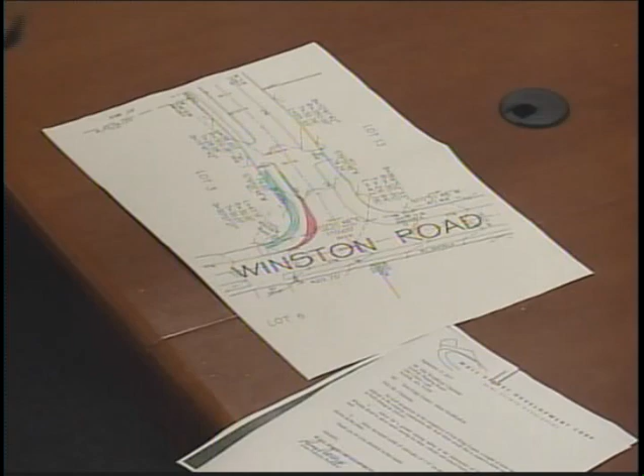What's shaded in pink is the area that should have, where the turning radius should be. The line on the inside is actually where it is, where we had a Cape Cod berm, which has since been removed, and the sidewalk has been constructed in the appropriate location. So the request is to allow a wider turning radius than what was originally shown on the plan, and the benefit is that it allows for larger trucks, buses, and other vehicles to make that turn rather than going back to what was originally proposed.

Let me just show you a photograph, I just passed these around. So what you see there is the line of where the radius should be as it's painted on the ground. So what would happen if we went back to the original plan, this pavement would be cut out, and the grass strip would just be wider than it currently is.

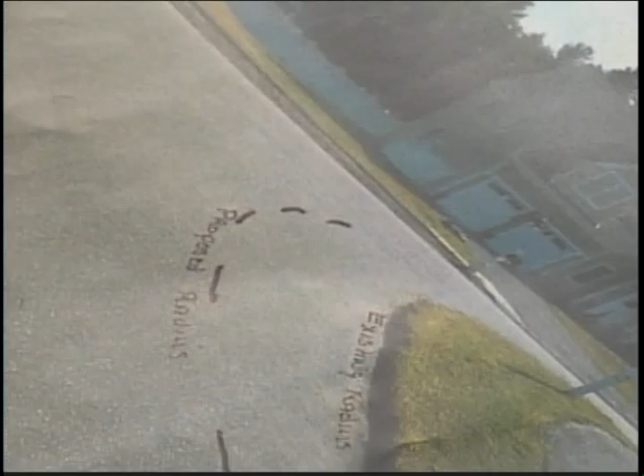After discussing it with Bob and John, we thought perhaps we may want a wider turning radius there for the school bus to get around and come up and around, and other construction vehicles. The second request was when they paved the sidewalk along Winston Road, in a couple of areas the sidewalk was paved a little bit wider than the minimum requirement of 5 feet. In the particular location where we measured, it happened to be where we constructed the handicap ramp. So rather than cut everything up, we're asking it to be allowed to stay at approximately 5 feet 6 inches, and the grass strip will be a little bit narrower in that location.

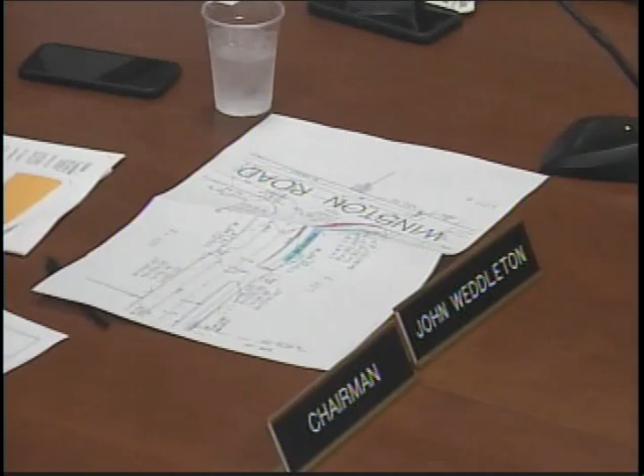So those two. How many feet of sidewalk are we talking about? Lengthwise, it's really kind of in this section. It varies, but mostly in that section where the handicap ramp is located. Yeah, so it's not much. If you put an eye to it, you really don't notice it, but if you actually put a tape to it, you will notice it.

Just a couple of comments. Thanks, Lou. My points are, when I talked to Lou, the change in the radius really is still in the right-of-way, which is the main thing. So he's not infringing on private property. He's not needing to get an easement.

And to move that back for the sake of making the radius according to plans, well, what you're talking about is digging up cement handicap ramps on both sides. There's a junction box there with a lot of electric connections. You're talking about moving all of that, and really, I think that's kind of punitive just for the fact that he's got the radius off a few feet. And again, it's still all in the town's right-of-way.

On the sidewalk thing, the same way, the sidewalk extra - and this happens all the time on construction - the sidewalks could vary, not exactly 5 feet. In this case, he's got a section that may be 5 feet 5 inches or so, but it's taking away from probably a 6-foot grass strip. So looking at it, it really is not even noticeable.

And the thing is, too, this sidewalk abuts another, these cement handicap ramps are everywhere. So if you made the sidewalk less, you're talking about jackhammering up the whole cement handicap ramp just for the sake of a few inches. So I thought it was absolutely a fair request.

I think it's a minor change, and Bob McGee, he's not here, but on the site he did agree with me. So that being said, comments?

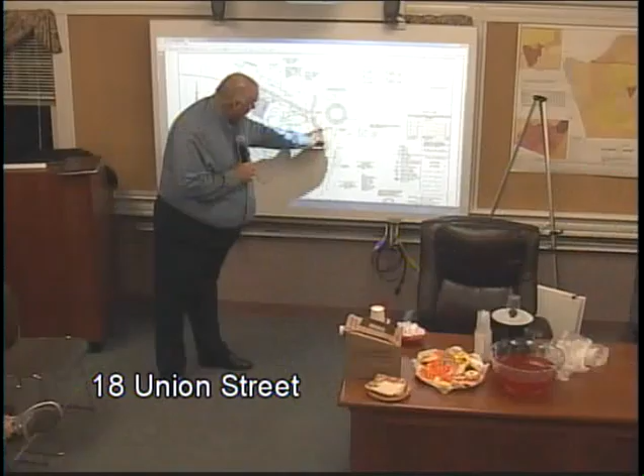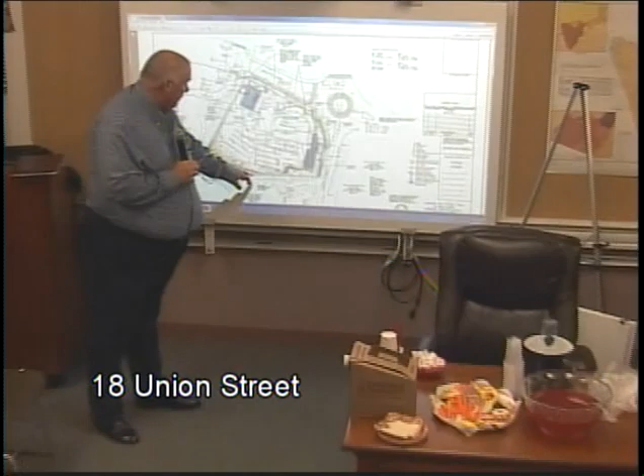So those changes were all agreed upon, and are they incorporated in these plans now, Rick? They are, Mr. Chairman. We've extended the sidewalk, which originally ended at the driveway entrance, down to their property. We've located all the trees, as well as the cesspool on the abutter's property, and we've pulled the retaining wall about 5 or 6 feet off the property line.

We've also introduced, shown here in green, some steeper grading that would be armored with riprap.

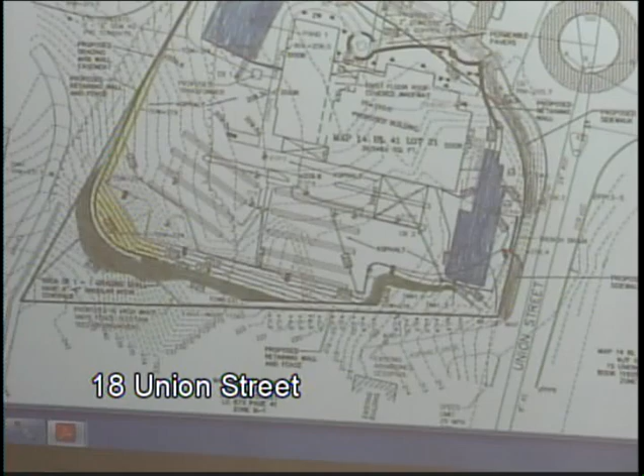While we're waiting, are those existing trees or new trees, Rick? These are existing trees on the abutter's property that they requested we field locate, which we did at that meeting. There are actually 2 rather large maple trees, and a majority of the trees are evergreen, which provide a nice screen currently from their property to this property, and those will remain.

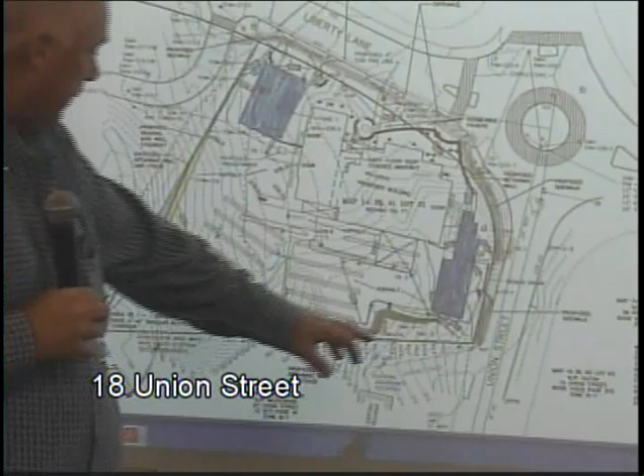What his suggestion was is that we move the retaining wall out, which we've done. With the revised grading scheme and relocation of the retaining wall, we're able to get this wall about 5 or 6 feet off the lot line, and the height of the wall is about 4 to 6 feet. What we're going to propose, and what Jason from Bowler will show you, is some landscaping plans on how to address the areas shown here in yellow, where there's another retaining wall located. That area will be planted to screen the height of the wall, which goes from a short height here to approximately the highest point at 10 feet.

If you recall previously, we had 2 staggered walls there. There's also a fence, which Jason will show you, a white vinyl attractive fence, that's going to be located on top of the wall with a planting area proposed in front of that. So we have that visual break of the retaining wall and then the fence kind of stepped.

So we can get into that. Jason will get into that as well.

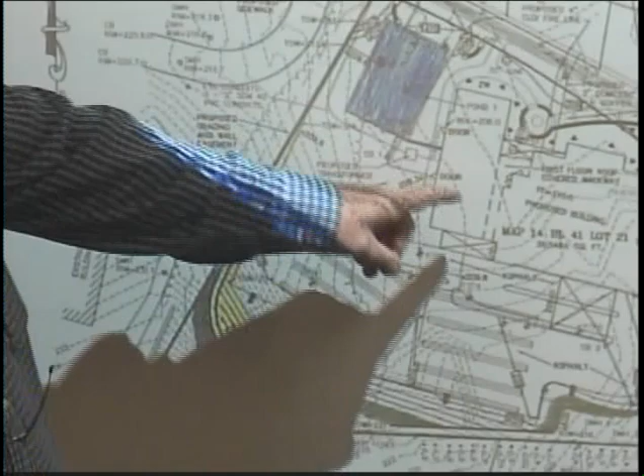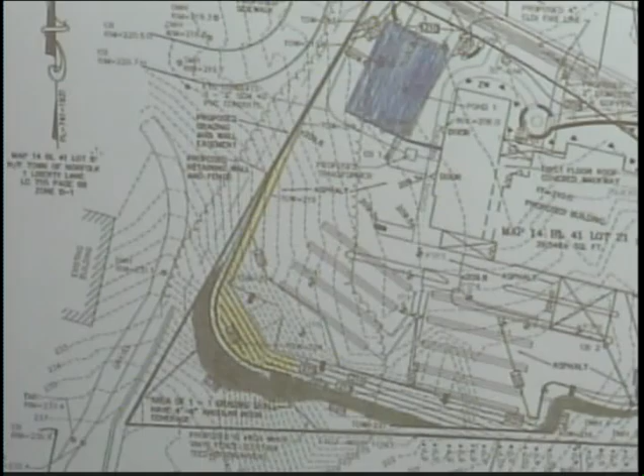What we've also done is looked at the stormwater for the site and containment of the stormwater, and we've made some revisions to the original proposal, which was to capture the stormwater, treat it, and then discharge it into the existing drain system. We're proposing an underground infiltration area here for the proposed roof of the building, as well as catch basin 1. That catch basin unit has been revised into a helical separator treatment unit to treat the captured water from that section of the parking lot. Catch basin 2 is where it was originally proposed.

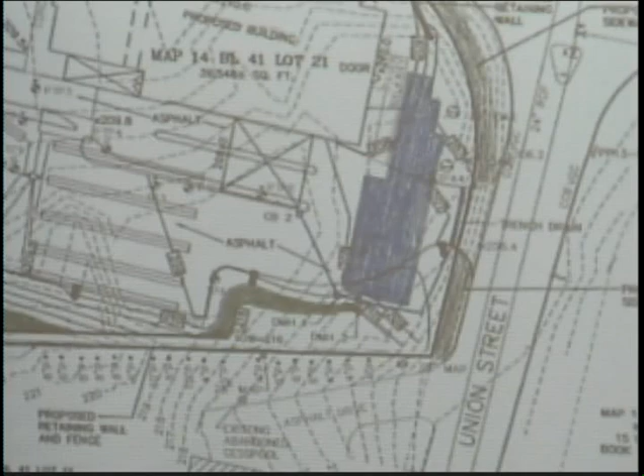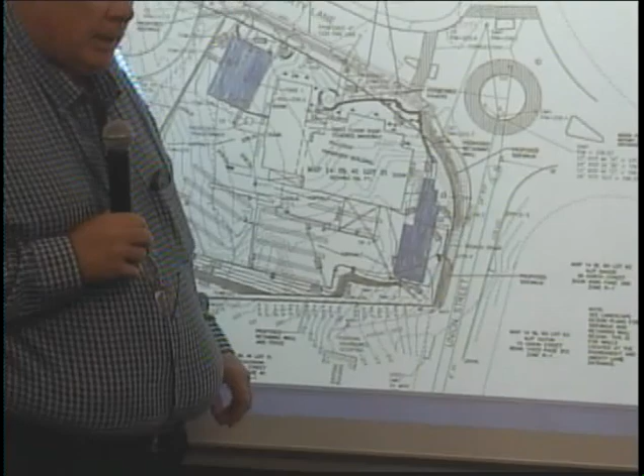There's a trench drain now proposed here that will route and capture the stormwater along with the captured stormwater from catch basin 2 into a central area, which is the CDS treatment unit, and then into that underground infiltration system. This system has been designed to handle all 5 storm events analyzed: the 2-year, 10-year, 25-year, 50-year and 100-year storm events. It's designed to handle these with no overflow from the 2, 10, or 25-year event, but there is a slight overflow from the 50 and 100-year event that will occur from that basin.

Where will the overflow go? It will actually come out of the trench drain, which will surcharge, travel down the gutter and into that catch basin. There's a summary in Appendix A of the drainage report that summarizes the rate and volume of the pre-development and post-development conditions and how there's a reduction.

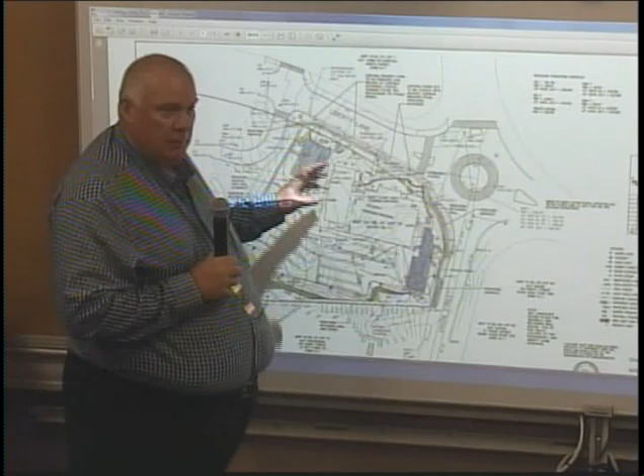The reduction for a 100-year storm event is from about 3.8 cubic feet per second down to about 0.8 cubic feet per second. Additionally, there's a small area in front of the building that's going to continue to drain off the site into the street gutter as it currently does. Surface conditions will be changed to a landscape condition and some brick paver sidewalks, which also contributes to that 0.8 cubic feet per second total being captured in the existing street drain, previously about 3.8 down to 0.8 in the largest storm event.

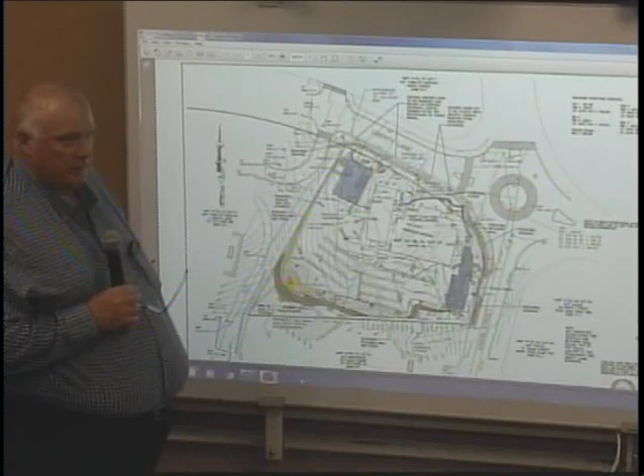So without losing everybody, basically, the post-development conditions are going to have less runoff than the conditions right now. That's correct, I think that's the important part of the whole thing here.

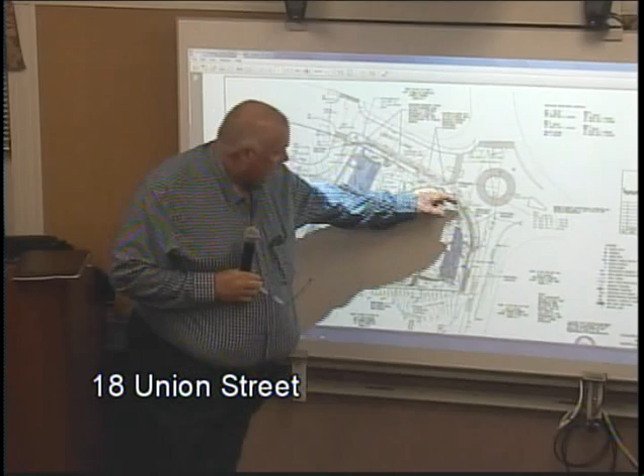We have also added a loading space to the site, which was one of the other items that was brought up. And as you said, we've made the sidewalk connection from the town property across the entire frontage down to the driveway of the abutters.

Yes, and those sets of parallel lines represent the septic system, correct? These lines here? Yeah, yes.

Thank you. Any other questions on stormwater from the board? No. All right, we'll have the next person up.

Right here. Kevin, could you, I guess they pushed the chair back, he's moved it. Thank you. Great, yep. Everybody see that okay? Now? Right here.

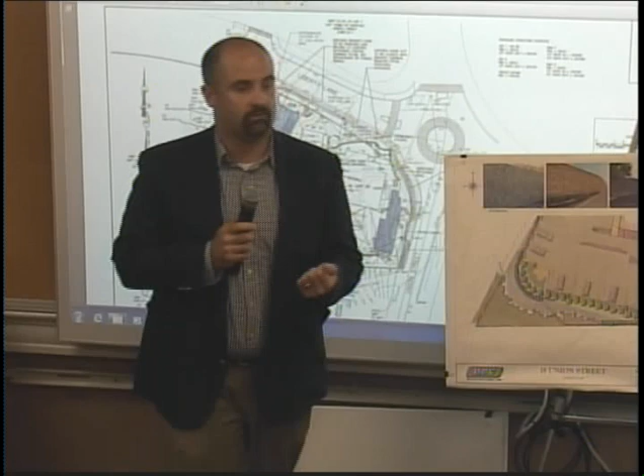Good evening, my name is Jason Miller, landscape architect from Bohler Engineering, and as Tom was saying, we took the comments from the last meeting about the retaining wall, and we re-looked at this really from Liberty Lane and how the walls would work, and then the vegetation as well, so when you drive up to it, you're not just going to see the wall, the retaining wall along that edge.

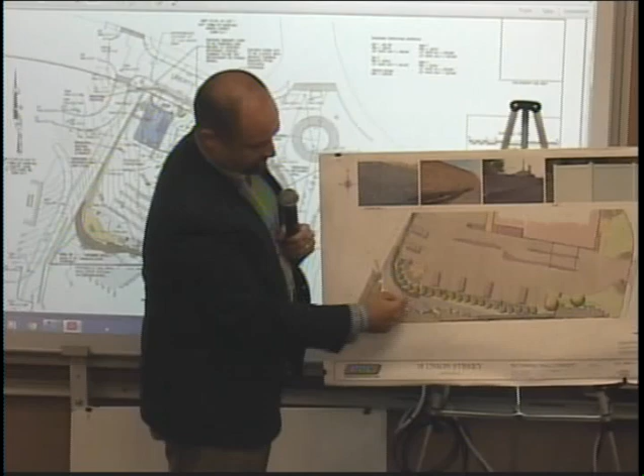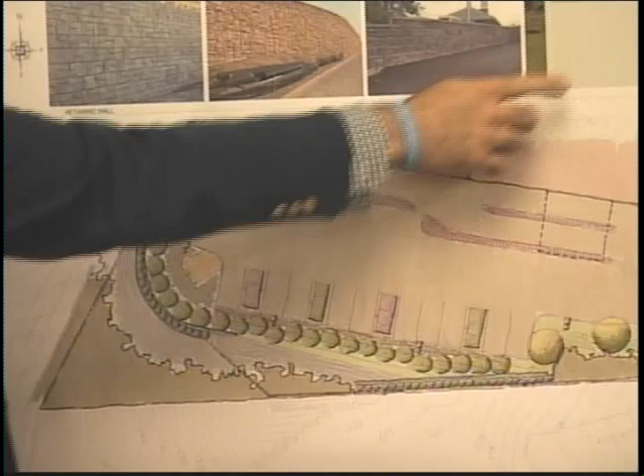So one of the things we did was have the wall come out and curve around, and then have a series of evergreen plantings in front of it that will soften that wall. This is where Rick was saying the height of the wall at the most would be 10 feet along here, and you would still have evergreens here and just be able to see the top of it. On top of that wall would be more evergreens, and then you would have your white fence, which this is an image of what that fence would look like.

And then these are also a few examples of the type of wall this is. It's a ledgestone, made to look more like a rock wall, which picks up on some of the other design vocabulary along Liberty Lane with the stone walls that existed.

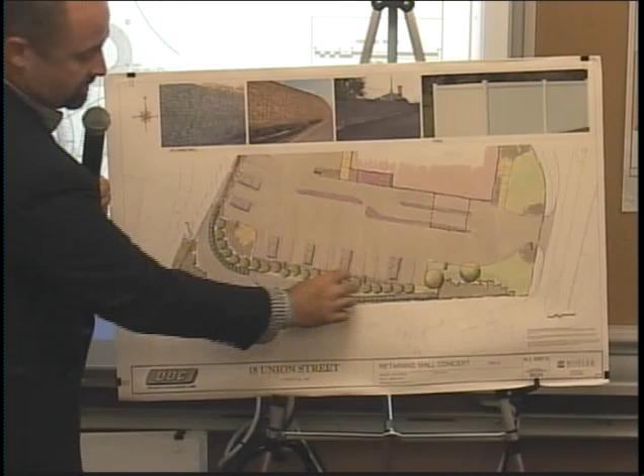And then have this break up with a steeper slope that slopes up, and then you would have the evergreens in front that would screen that whole area. So the only thing you would really see on this edge is just the evergreen trees themselves, and it'd be a mix of different evergreens, spruces or firs along there.

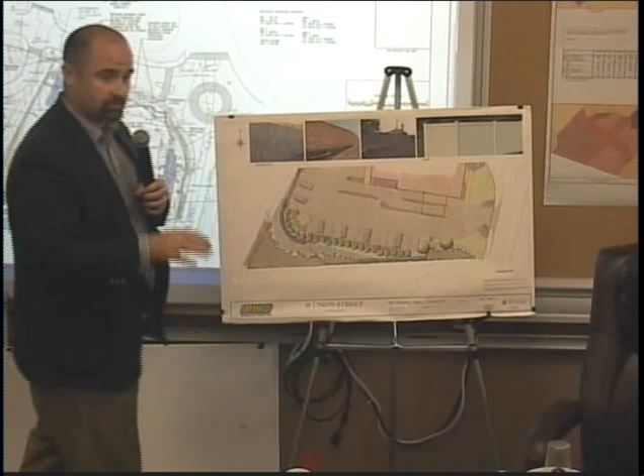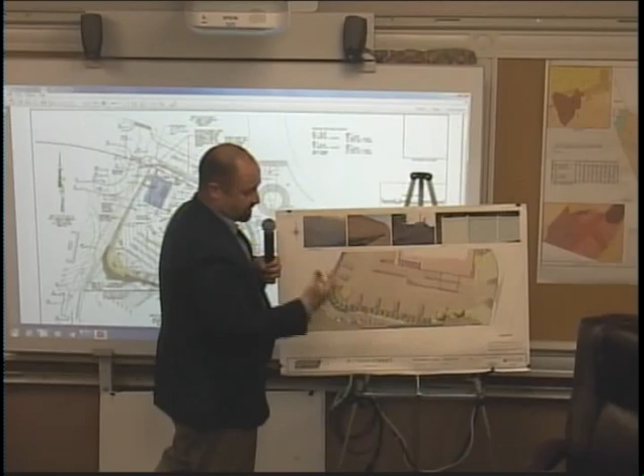And then this wall, with that being the 4 to 6 feet, as Rick was talking about, you wouldn't even see most of it from the driveway itself because of the way this is a nice gradual slope up, and then having the evergreens on top of it, and a nice landscape edge between the back of the wall and the abutter's property here. And that just emphasizes more of that nice buffer planting that he has existing.

And that's the one that's 5 feet off the lot line. Yes, this wall right here. And then we can continue our street tree plantings along that edge as well, and we may wind up adding more evergreens along that edge to fill it in nicely. And then around the dumpster would be more low grow, so it's a nice layer effect of the landscape from the pavement going up to the evergreens themselves.

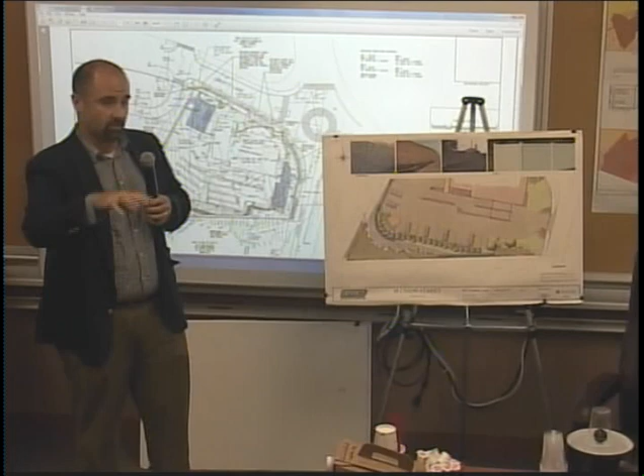And then you have this, so the fence line, as Rick was saying, follows along here, and then it goes right along the back of the wall, and then it picks up again where you have the fence here, runs along the property line to there.

In adjusting the position of the wall and changing the curvature, et cetera, did it cost you any parking spaces?

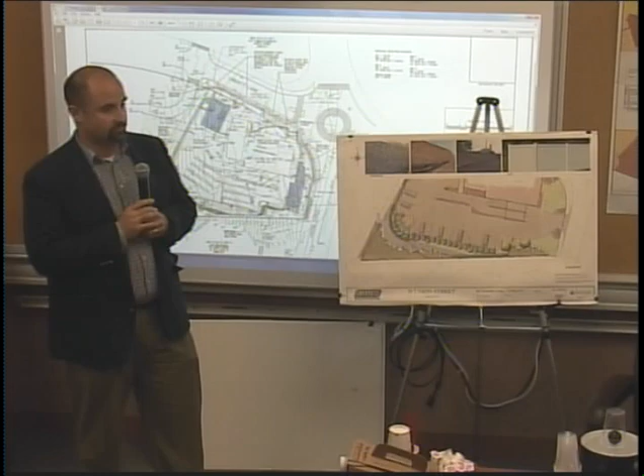How's this? Much improved over the last plan. And I think the neighbor was happy. Have the neighbors seen this? No, has the neighbor seen this plan? It was explained to him, but I don't think he's physically seen enough of it.

We actually wanted to get the input of the board to make sure they like how we approach this and how we design this, and then we can finalize it and submit it to the town for their review. All right, very good. Thank you.

So we're going to give the short version of the traffic report, because we didn't have a full study done, but I think we sent you off to try to determine from historical data the speed coming down Union Street as it approaches the egress of the building. Is that correct? That's correct. For the record, Bill Scully with Green International Affiliates.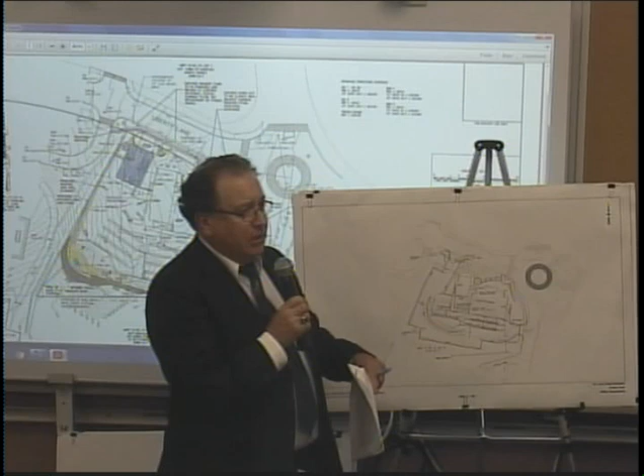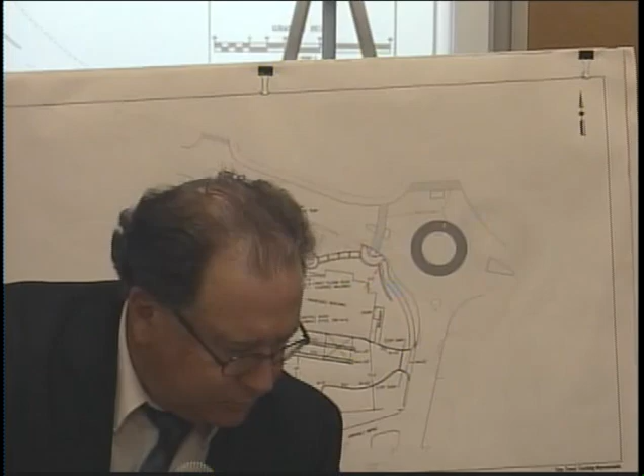So at the last meeting there were a couple things requested. One was additional speed data going in and out of the roundabout on Union Street near the site drive. We set up tubes about 80 feet south of the circle, capturing both directions, and had that out there for 48 hours. Our report, dated September 6th, which I believe the board has a copy of, details the data and summarizes the information.

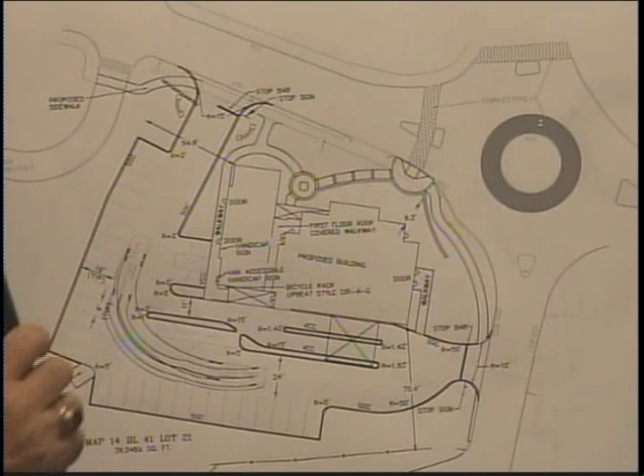I think the question was someone suggesting there was very high speed going south past the site drive. What we found was about 90% of people are going between 20 and 29 miles an hour as they turn and start to proceed southbound, which is fine. We looked at it as if it was 30 miles an hour for our sight distances. The average speed southbound was 23 miles an hour, measured from almost 3,300 vehicles going past that.

The other 10% were doing what? Well, they'd be doing over 29 miles an hour. So we did see 2% of the vehicles were doing over 30 miles an hour. In general, we felt it was low speed. It's lower obviously as you're going into the circle and people are slowing down. Almost 90% were going 15 to 24 miles an hour going in. So that's what we would expect.

The other thing that had come up was crashes around the circle, so we researched that. Over 3 years of data, we identified 3 crashes in total. One was a bike, one was a vehicle that hit the splitter island coming south, and I forget what the other vehicle was. But in general, 3 crashes over 3 years with the volume going through there is a very low incidence of crashes. You do have visibility, and the town has taken steps to try to slow people down with signage. I did sit with the chief and went over that information, and he felt he wasn't seeing anything I wasn't seeing, both from a speed and a crash standpoint.

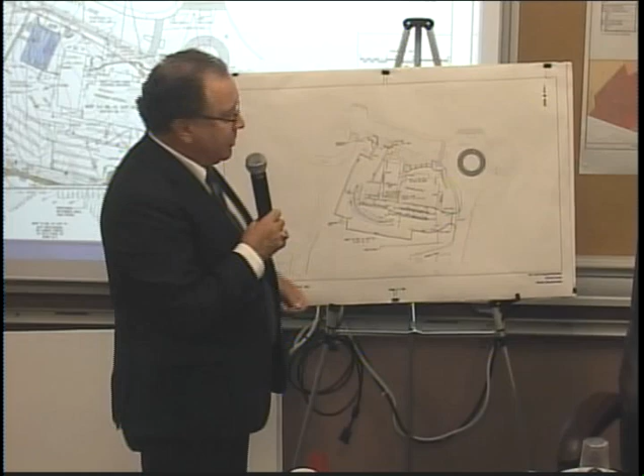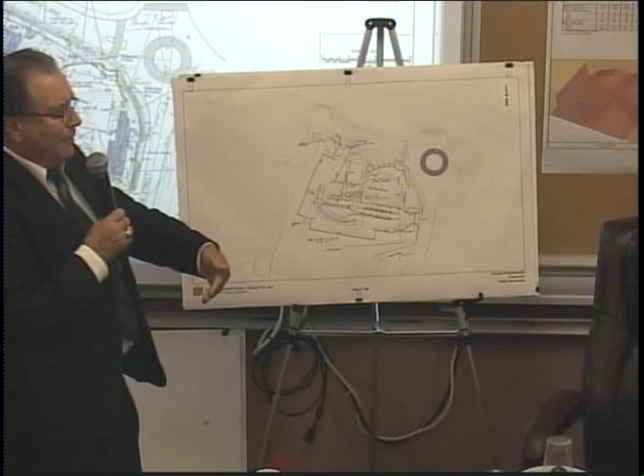The last thing that was asked was to test the movement of large vehicles, in particular the fire truck, to make sure they can get on the site and circle around, and we did that. In the September 6th report we attached diagrams demonstrating that. What we identified at that time was that the fire truck's turn around the proposed loading zone had a little bit of an encroachment, so we worked with the site engineer to adjust the loading zone. We went back and tested once the site plan was adjusted, and the fire apparatus can turn into the site from that direction, circle around, and easily get out and head back to the station.

Did you look, in terms of entrance, at the alternative proposal to come off the town hall driveway as well, in terms of turning radius for emergency vehicles? Yeah, we did.

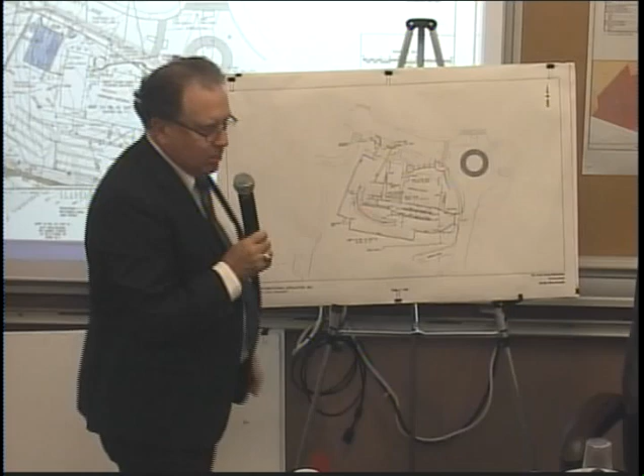I don't think that was in the September 6th report because that wasn't the plan you guys were analyzing. Just so we have looked at it - obviously if the connection is coming off the town hall drive, this piece is going to be widened out. Yes, we were able to test that. The movement is probably a little trickier than just making one turn; they have to come in and then turn again.

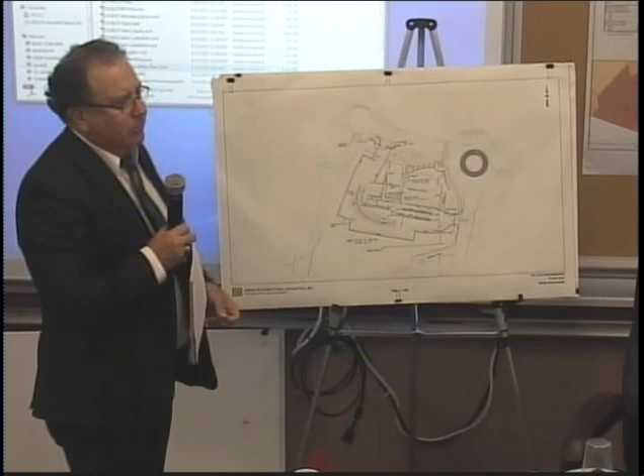Betsy, do we have a letter from the fire chief on the access to this potential property? I don't remember - if we don't, could you ask Cole to give us in writing his comments on accessing and entering/leaving the site, this town hall property potentially. Just make sure he's confirming that everything works, both alternatives, I guess. Haven't we settled on one? We used the ladder truck, the same layouts we've been using. I'd just like something in writing for the file, that's all.

So these updated diagrams haven't been submitted, so we'll submit these this week to the board. Okay, great, very good, thank you.

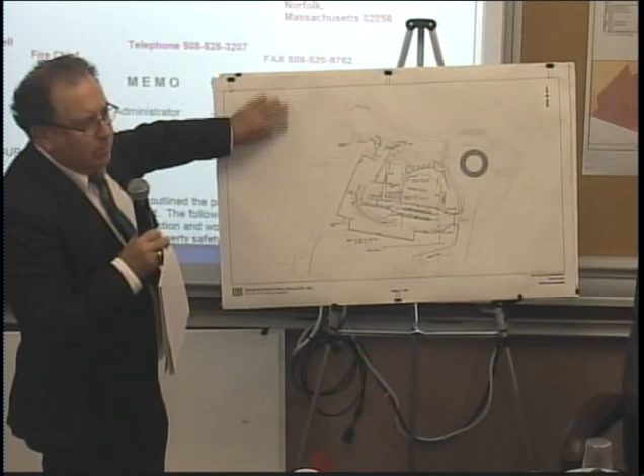Questions, guys? Has any of this information been shared with Mark either? Because I know he was the one really driving the traffic discussion and his beliefs on the speed and whatnot. With the abutter? Not yet - if he's come to the town to obtain copies of the report, I don't know. Why don't you just reach out, Tommy, and tell him, since he was interested in the speed on Union Street. If he's interested in getting the historical data from the report, I'll be happy to send him a copy. All right, super, thanks Kevin.

Right, no other questions? So our consulting engineer reviewed the last plan but has not reviewed this plan because we just got it recently. So you'll be looking at this, Phil, and next time give us a recap on this latest plan.

Is there anybody here in the audience for the 18 Union Street filing? Nobody. All right, so that being said, we can continue this meeting. When is our next meeting, Betsy?

October 25th. Why don't we continue this? Do we have anybody else on yet? Nope. Why don't we continue this for 7 o'clock on October 25th, if somebody could make a motion? So moved. Second. All in favor? Aye. So we'll see you guys at 7 o'clock on the 25th, okay? Very good, thank you. You're welcome.

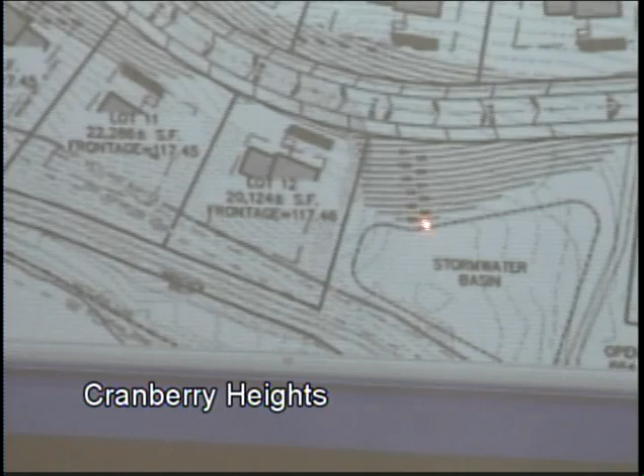We've identified this area for stormwater collection. That was the area previously designed and approved for stormwater in that general vicinity. So we've got a low point right about in this area. Then we start to climb the hill again, because we're really just trying to work with the existing grades to the best we can.

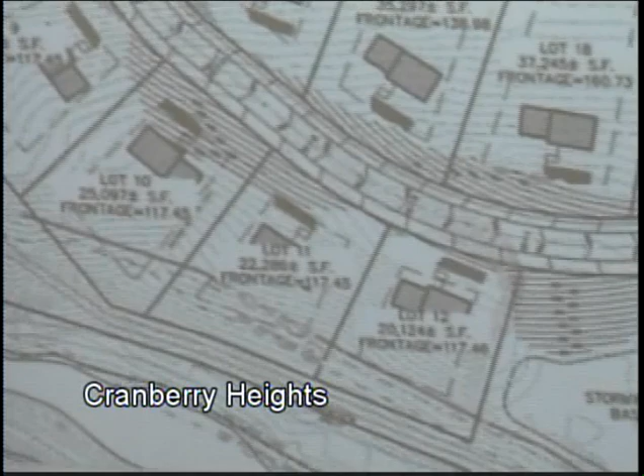And comply with subdivision regulations for centerline grade and minimize cuts and fills. So we climb up at about 5% until we get here to this intersection, and then we're relatively flat — about 2 to 3% from here back out to Eagle Drive. So the largest cuts occur at the top of this hill, because we're climbing, trying to minimize the fills, to balance the fills we need with the cuts we have up here.

So at the peak around here, we've got about a 14-foot cut. But as you can see, for your benefit, we graded out the lots in this area to show you the extent of the grading in this area — the back of this lot and how all these cuts tie into existing grades.

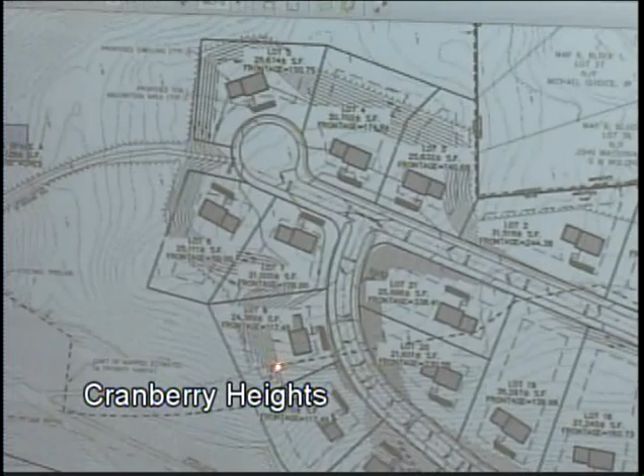The rest of these, as you can see, this is a cut slope on this side of the road. This is a fill slope on this side of the road. A cut slope here, a fill slope here.

So how do they net out, Steve? I guess the neighbors are probably interested with everything going on across the way. What's the net truckloads coming off the site, roughly? I have it on the plan. Betsy, can you pan over to the notes on the top right?

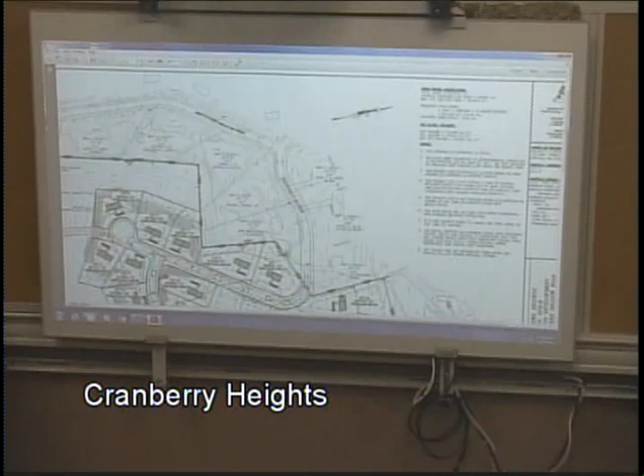All right, so we have a net cut of 100,000 yards. We have a cut volume of 114, a fill of 13, and a net cut of about 100,000.

So at 25 yards a truckload, how many trucks is that? 100,000 divided by 25 — 400? 100,000 divided by 100, divided by 40, 400. 100 times 100,000. 400. Big trucks. 4,000. 4,000. 4,000. 4,200. That's why I asked for the calculator — it's easy to make a mistake.

So right now, we have a public hearing. Have you talked to Mr. DePlacido, who's doing the front part? The applicant has spoken with Mr. DePlacido.

All right, yes, because right now we have a hearing coming up for safety of Lawrence Street, and what we're going to be addressing is what we need to make that safe. You folks are going to end up being a part of that, because right now we've got a long stretch of roadway with 240 or 250 homes going in there with no sidewalk, with a 19-foot road. So just to let you know, when you guys come up with your plan, I'm not sure if you're going to be looking to waive one sidewalk or not, but I think the board is going to be asking you for some contribution.

When the town officials come up with what they think is needed to make this area safe, then you're going to have to be doing your pro rata share. And I did talk with the DPW and the fire chief — you'll probably end up having a fire flow test done because the elevation change to get the water up there is significant. And right now, Mr. Marini on Liberty Lane has already put one in, and his grade is substantially less than yours, so that's going to be coming up down the road.

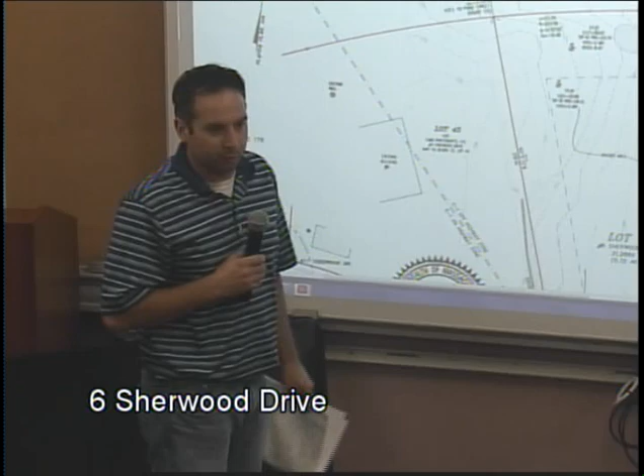Good evening, Brian Gillis from Dunn McKenzie here with the applicant tonight, Brad Murphy, and Jimmy Neva from Dunn McKenzie. As stated in the opening comments, Brad is proposing a 4,000 square foot steel building over on 6 Sherwood Drive, right near David Road also.

This site was originally approved in '07 or '08 under Petrucci Construction, pretty much the same identical design, same building, lot layout, same use, everything. Brad's looking to purchase that and develop the site pretty much identical to what was previously approved. The site is currently wooded, sloping easterly down towards the end of Sherwood Drive, fully wooded right now, moderate slope.

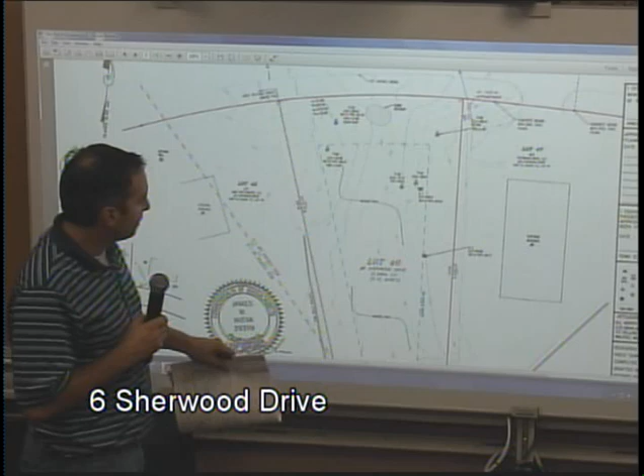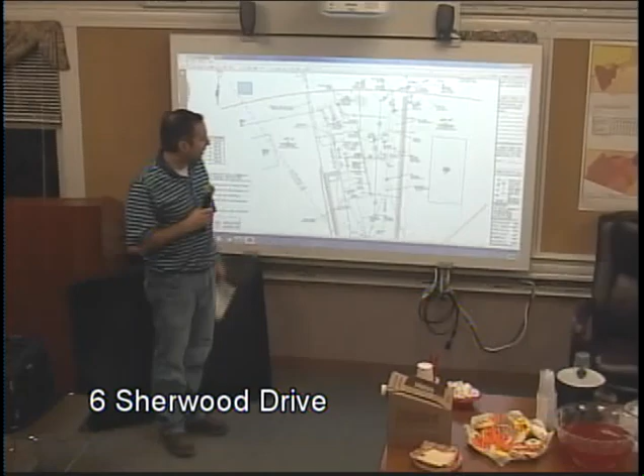Betsy, if you don't mind going to the next sheet. Underground drainage, we're proposing infiltration beneath the paved parking area, a 4,000 square foot building with 5 bays. It will also have some associated office space inside, pretty small. Septic system underground, out front, with some Cultec chambers.

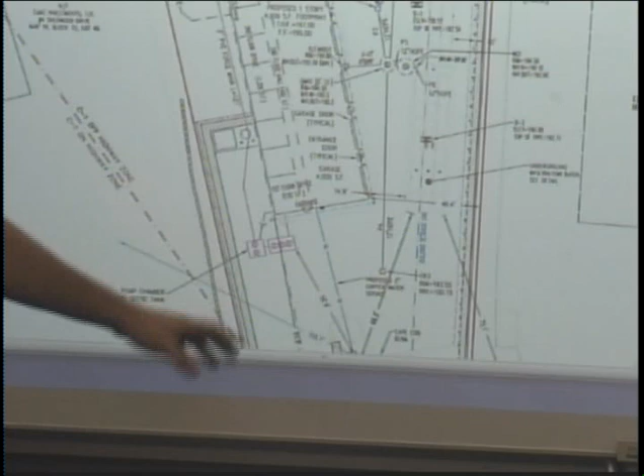Retaining walls on the westerly and easterly side of the property, just because we have the slope. We're proposing 1,000 square feet of outdoor storage area to the rear of the site, where the applicant can dump mulch and then scoop from the pile and load his truck if needed.

Septic will flow out to a septic tank, to a pump chamber, then pump out front to the leaching field. We do have numerous setbacks here to meet, just because of adjacent wells and adjacent septic systems on the abutting sites. The proposed use is similar to other sites within this area, and we are also working on a design almost identical to this for the site adjacent just to the back side of this, but it was not filed.

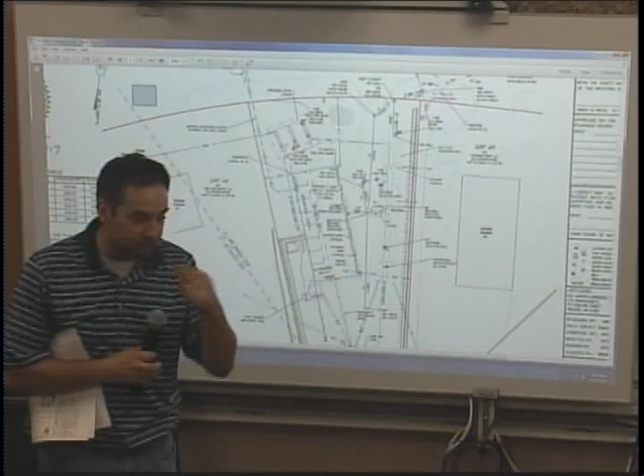Where's the well on your site? The proposed well is right here at the edge.

So you're gonna have a metal building, keep materials and equipment inside, or just equipment? It'll be vehicles and equipment. How big is the building, the footprint? 4,000 square feet. One floor? It's going to have a mezzanine for offices.

Okay, and you're gonna be storing landscaping supplies? Landscaping equipment, yes. And where is the storage area gonna be? Is that designated on the plan?

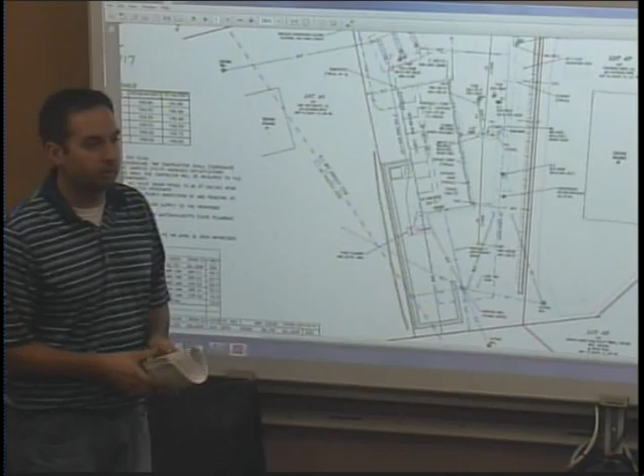Is it gonna be in a bin? Yeah, it's going to be in the bin. It's not gonna be on the ground? No, it's going to be in a wall block bin. But it's not gonna have a bottom, it's gonna have ground at the bottom, correct? It's going to be asphalt. Oh, it is? Yes, gonna be asphalt. Right now we just have proposed damp gravel, but for drainage calcs, we modeled it as being pervious.

I think it's kind of important, we'll get to our consultant, but I think we're near the well and you've got these materials that are gonna possibly leach. The asphalt probably is gonna be a good idea, but anyway, go ahead.

Then we're right at the lot coverage calculation. Sorry, if we do pave this, I think it brings us right up to exceeding the proposed lot coverage. Brings you over the coverage? Yep.

Okay, but I think that's pretty much it for the presentation. I was just going to open it up to questions. I know there was a bunch of review comments.

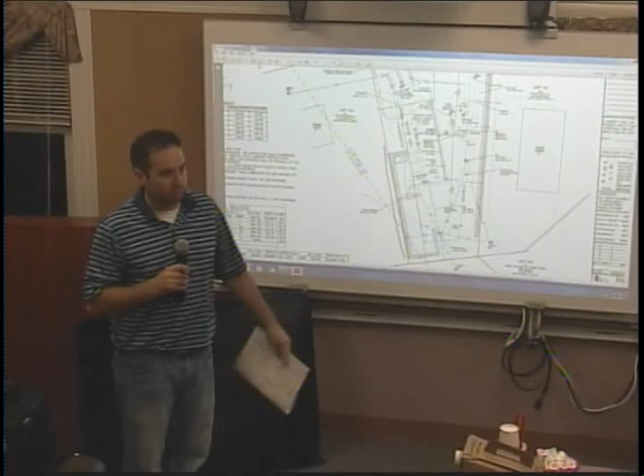Right, we had a letter from our planner, our peer review person, and also the Board of Health agent. You guys haven't applied for septic yet, right? No, we have not. You have a copy of the Board of Health agent's letter? All right, could you make sure they get a copy?

Yep, Betsy, of course. You might want to look at that, and I would guess maybe start that whole process, because I think there's a lot of barriers you have to work within to get a septic system in there that meets zoning and code, okay?

It was approved back in '08. We needed to have the septic system approved. Right, all right, but that's gone by and it's not approved now. Yeah, we're going to refile.

All right, so I'm just basing what I got on the report I read from the Board of Health agent. So I would suggest you at least make contact, probably as you're working with the planning board, just to see if you can figure out his concerns and work around them, because his concerns may affect the actual layout and design of your whole project. So I think to do this simultaneously would be a big help for you, so you're not getting through with us and then having to regroup and change the plan because of the septic requirements, okay?

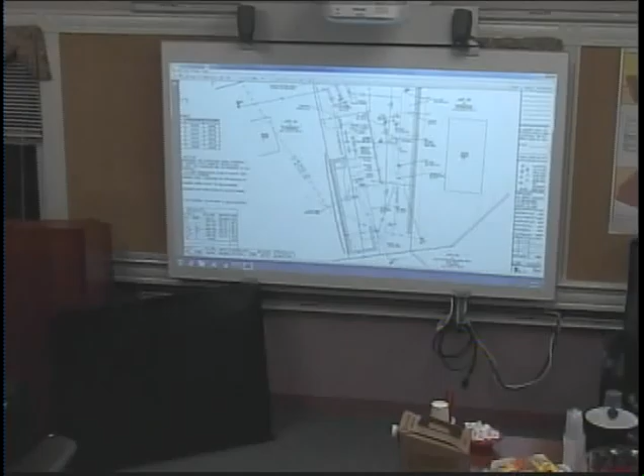We included the top of the retaining wall as being impervious. It's actually the block we're speccing, you actually fill over the block and just leave like a little reveal. But we just still assumed it being all impervious. So if you're comparing the landscaped area, like the little strip to the east between the face of the retaining wall and the property line, we didn't count that into the landscape areas. But we can clarify that or break that down so it adds up to the total square footage, so it's clear.

And deal with the 1,000 square foot of asphalt as well, right? If you guys are asking us to pave that area, yes. Well, as John pointed out, it's right adjacent to the well. Couldn't be any closer if you were touching.

Okay, they have an erosion, sediment, and dust control plan. And I just suggested that there should be a plan for blocking the entrance during times of no construction, just in case there's a big storm during a weekend or when no work is being done.

Comment number 13, the driveway and parking lot construction standards appear to comply with the rules and regulations, with the exception of Cape Cod berm for the parking lot, which, while that doesn't comply with the standards, they could ask for a waiver. All the other facilities in this area have Cape Cod berm around the parking lot, pretty much.

And then they have a number of waiver requests for traffic studies, impact studies. They actually do have the waiver request for the Cape Cod berm. Sidewalk requirement, there are no other sidewalks on the street. The bigger one probably is the subsurface drainage system to be allowed to be closer to the lot line than 25 feet, and 25 feet from the slab on grade building.

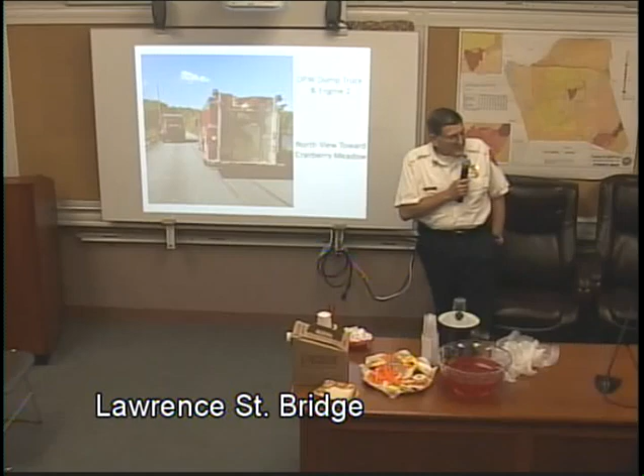Thank you, Mr. Chairman. Certainly enjoyed tonight's... there's some punch, too. I certainly reserved that for the end of the presentation. I want to thank you very much for the invitation. It was an opportunity tonight to watch the Yankees hopefully win and cut another game off the Red Sox division lead at this point.

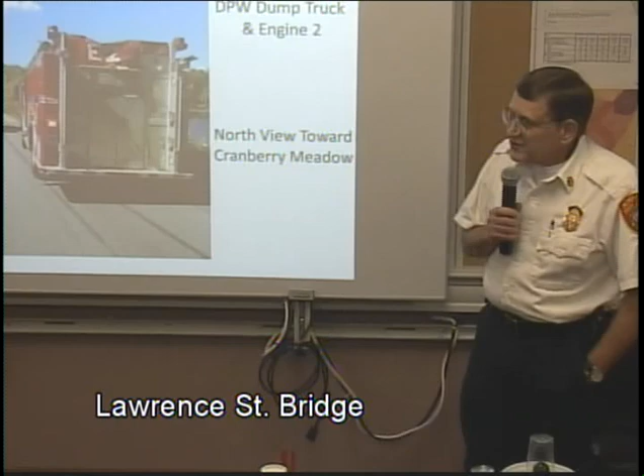Lawrence Street obviously is going to be an issue moving forward. And one of the things in talking with John as the chairman was that I really don't want to be involved in a safe or unsafe situation. And I related to him and the board that I'd be more than happy to come here tonight and talk to people and address these issues and talk about just from a standpoint of the empirical data that was there.

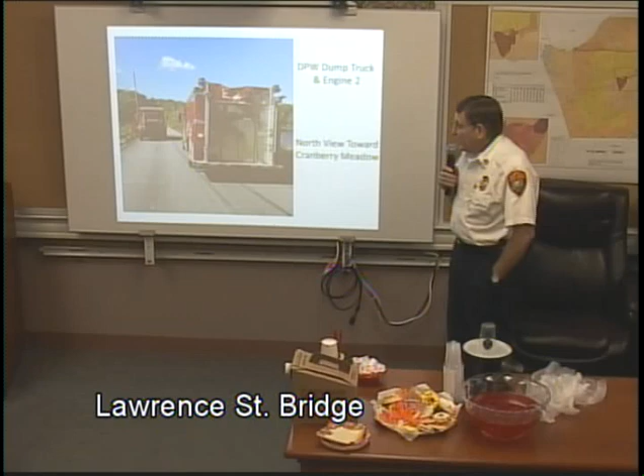Knowing that this might happen, I started doing some photography on the site a few weeks ago before John had come in contact. This is just an overall presentation. We're going north on Lawrence at this point with a DPW dump truck. Engine 2 is our primary response vehicle to all incidents in the town of Norfolk, so you get some orientation.

As a view north towards Cranberry Meadow, you get an idea again. We're just on the other side of the bridge. You get the idea of how this looks when you have the two vehicles there. Again, another view. We're now looking south towards Park Street. Let's go to the next slide.

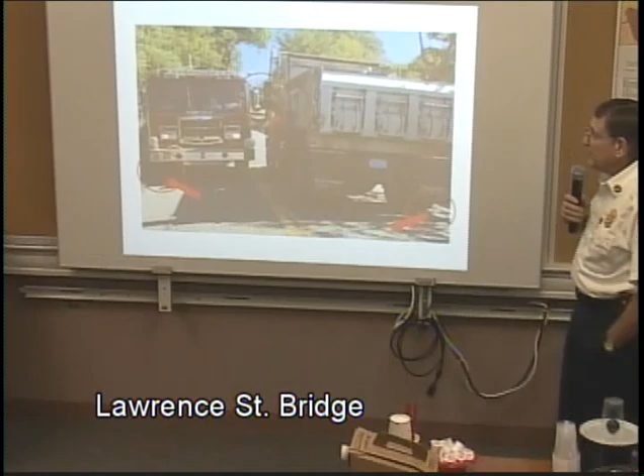So some of the things to keep in mind: the vehicles that you're seeing do have a situation in the middle of the screen. You'll see that the mirrors are very close, and if the photographer who's taking the shots did a better job, you'd see that the mirrors would actually hit as the vehicles passed at this point. On the left-hand side of the photograph, a little fuzzy in this presentation, but Engine 2 is basically off the pavement here a little bit, probably by about 4 or 5 inches. It's a passenger side tire.

The DPW dump truck in the lower right-hand side of the photograph - you can see that truck has moved inward a little bit towards the yellow line, and there's some space there.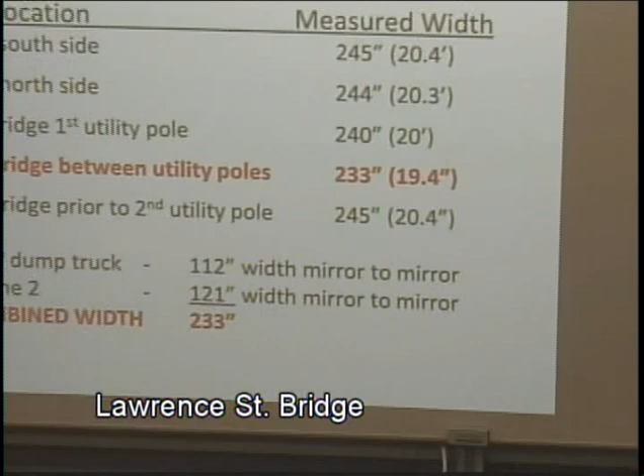So, took some random road width measurements - say that 3 times fast. This was done with a walker. There isn't a scientific value. I stayed at a Holiday Inn Express last night, so I am not an engineer. I turned that over to my good friend Rick.

But the general locations that you have here, if you look down, John had mentioned it's basically 20 feet. The small area there north of the bridge between the utility poles is about just over 19 feet going in that direction. If you look at the vehicles that we had there and you measure these vehicles from each side, the overall width, the dump truck is 112 inches mirror to mirror. The fire engine's 121 inches. And my math comes up to 233 inches, which equals that small area that we're dealing with.

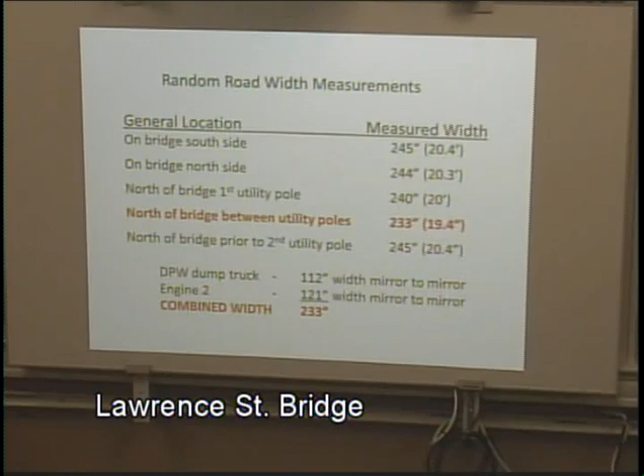So you get a little bit of an orientation with a piece of fire apparatus. The one thing that I would point out, just so that there isn't any confusion, the fire department is kind of like the Marines - we adapt and overcome. I can unequivocally state that we've never had, in the 13 years I've been here, an incident where we've not been able to reach an emergency, either with our ambulance and paramedics or the fire apparatus. People are generally very good about getting out of our way. And if not, we can always nudge them along. But I just wanted to make that as a matter of record as well.

John had mentioned that the sides of the road surface in the area - I guess referred to more as the causeway, north of the bridge heading towards Cranberry Meadow - some of that area has been undermined over the years. You get an idea that some of the deterioration has taken place just from general erosion and use.

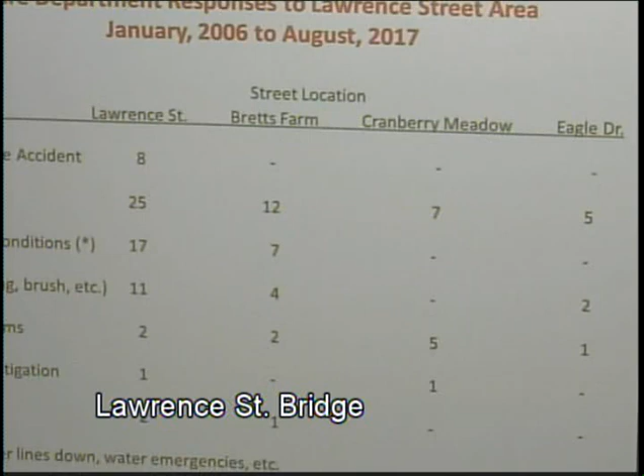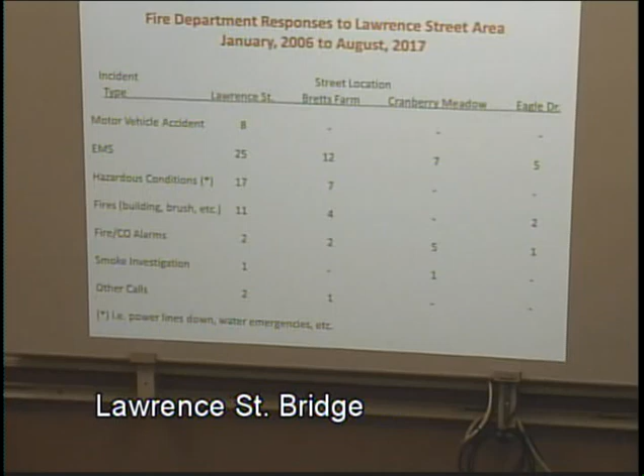I just want to give you a clear picture of what the fire department has done in the Lawrence Street area since 2006. Looking at pretty close to an 11-year period, we broke all the incidents down by street and type of incident.

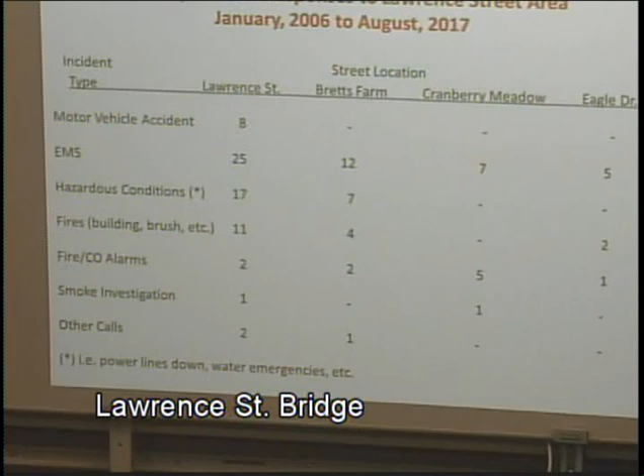Motor vehicle accidents over that period: 8 of them on Lawrence Street. I can tell you we've had 2 that have gone off the road that I've been at. Both of those involved what we'll call impaired operators, taking place well after midnight. You can do the rest of the supposition there.

Medical calls on Lawrence Street - something we go up there for periodically, but there's not a lot of call volume when you look at this over the period of just about 11 years.

Since I've been here, we've had one serious fire on Lawrence Street, the house up between Brett's and Cranberry Meadow. Other than that, we deal with the nuisance situations that unfortunately come in any area where it's vacant, and that would be the Placido property.

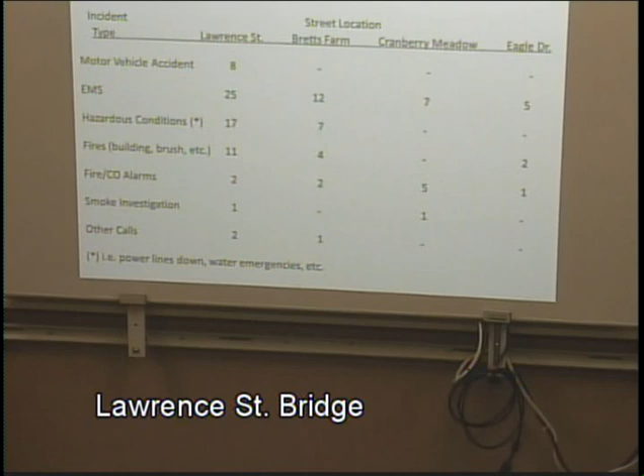The Placido development has been very good working with us, and I'm sure Chief Stone would indicate the same, trying to limit the people who are on that site, and it's very difficult. We've had one very serious medical that occurred out there in a dirt bike accident last summer. It's a very difficult site. Certainly development out there from our perspective, limited and narrow-minded as you look at this, would certainly be helpful.

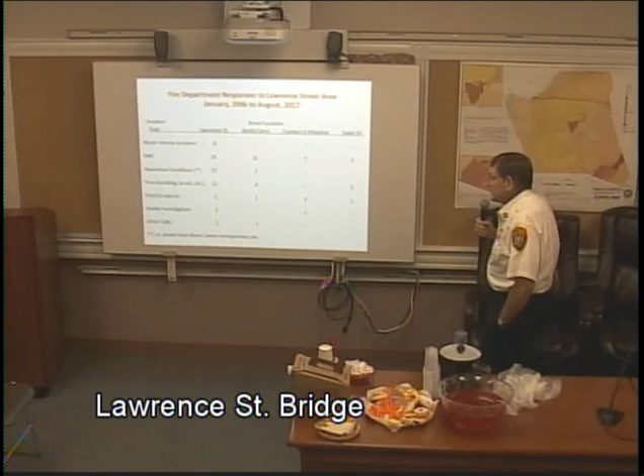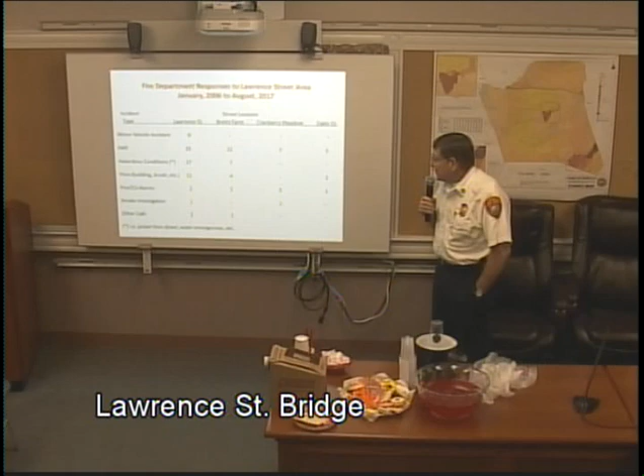But once again, the message from the fire department is we can get to where we need to go. You have a presentation here that shows what some of the constraints are that we would deal with. We would get to you if you're on Lawrence, Brett's, Cranberry Meadow, Eagle Drive, and you're also in an area known as an automatic response for Franklin. They come in from their end, depending on the type of call, with an engine or a ladder company.

Question: so the character of this road is going to be changing. The vehicle trips are going from 800 to perhaps 4,000 per week, and I don't think there's been much construction up in that section of town in the 16 years or so I've been in town. But considering the new activity going on this road and the conditions, and assuming various truck drivers are not going to cross that bridge, what speed were you going, a mile an hour as they passed, perhaps?

They're standing alone, all right, they're standing. So what, in your estimation, to provide proper clearance for people going a normal rate of speed, that 20-foot wide area - what do you think it should be to provide normal passing of vehicles on that roadway?

I don't want to sidestep the issue, but as I indicated earlier, that would be a question handled by someone from an engineering standpoint. We'll get through the best we can, but I'm not in a position to say whether it's a super highway situation or a country path we're looking at. I think that's a higher authority than mine.

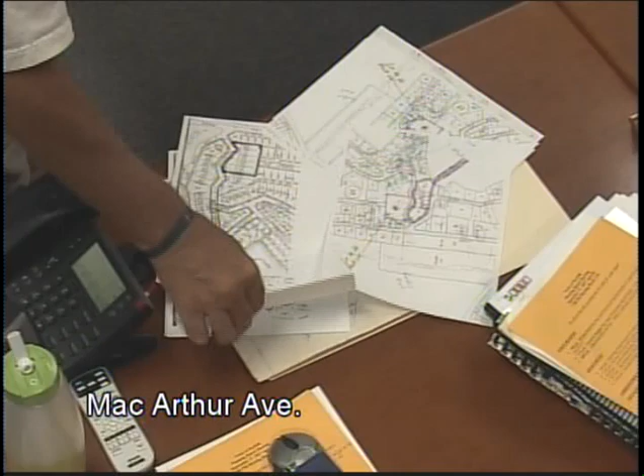Going way back whenever, you know, all these other, I should probably give you a cut of these too. This is what this whole subdivision looked like back in 1945 when it was approved.

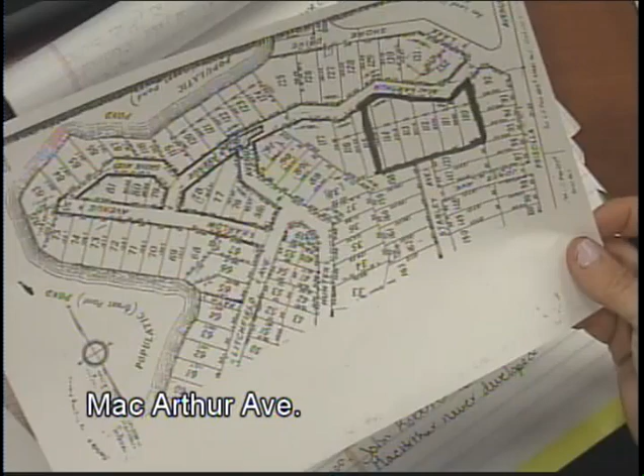So there was a potential for a lot more homes to be built up here. Now, over the years, people have pieced the lots together and built on them. What I'm trying to find out from the board is if they would allow something that is safe and adequate for this site, for one lot. If you notice, there's no other pieces of land up there that can be built on, other than, let's see, what doesn't it show up here? Oh yeah, lot 20, at the end of Hunter Ave, that's a potential, but it's very, very steep to the lake.

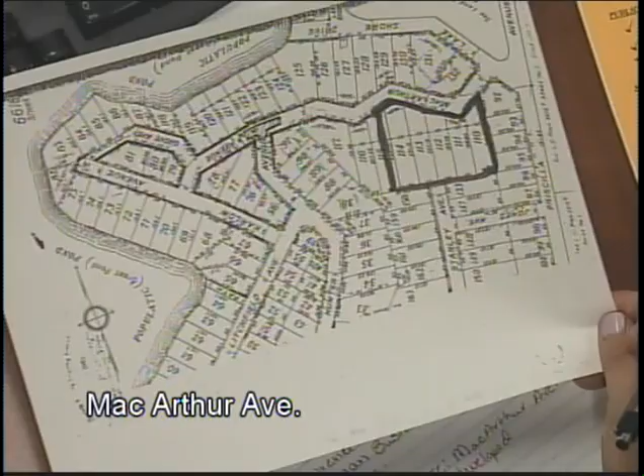So what I'm trying to find out is if the board would consider a small road to be put in for this one lot, it's an acre and a quarter lot. And it does conform to zoning up there. Unfortunately, it doesn't have a street frontage.

All right, so you had 3 or 4 meetings on this, so let me just cut to the chase, John. Just so you guys know, this is, and Gino, when I misspeak, please tell me, this is a paper road, they call it platted land, and when Ray was here, the research was done that said this could be an accepted right-of-way as long as it was provided with safe and adequate access from the street. Is that correct? Yes, it could.

Yes, I would say. And remember when Ray gave the case study, the persons using this platted road now have to maintain their same rights. So if somebody is going off this gravel path right now, like the man on the corner, the road that's built has to give this man the same egress that he's enjoyed from day one. That was the guy showing up at all the public hearings for you.

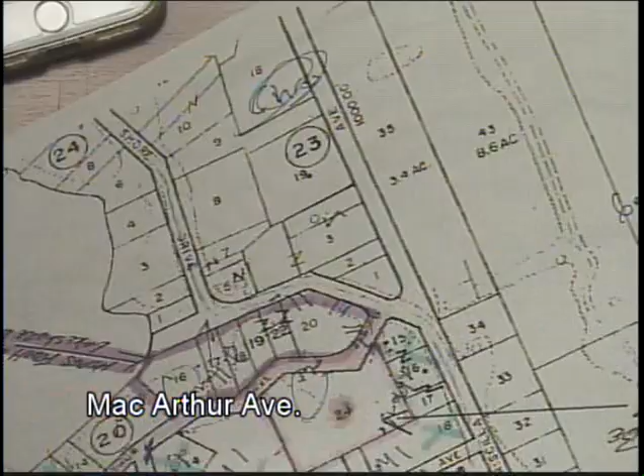So I think the best way, it's kind of got a funny angle here, John, and I think you can eliminate, well, I'm not sure. What you have to do to at least get us started, you have to have some engineering done, and the engineering has to basically justify that you're providing a town road that is able to be accepted, that provides safe access to your lot. Am I saying that right, Gino?

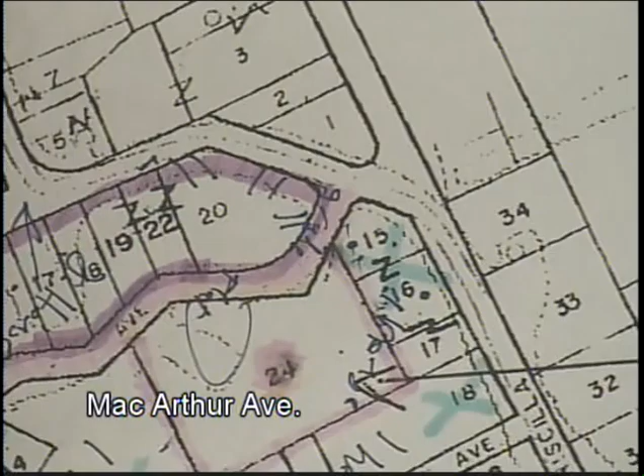Yes, and wasn't there a similar small subdivision of like 2 lots off of Priscilla? Just approved that, yeah, there was. I know this lot has a steep grade, so he's gonna have to get the grade to conform with our zoning regulations, but I think that looking at it when I walked it, it may be able to be done with some type of retaining wall, and there would have to be some type of a temporary turnaround unless the board allows something different for fire access.

So I think your next step, and then I'll open up to questions from the rest of the folks here, I think your first step is to just get something on a plan that gives us dimension of the proposed road, the grade of the proposed road, the access for your lot showing frontage on that road, and the access for the neighbor here that is using it now. There it is, I think that would be a... well, it's going to be, well, the thing is, I just want to make sure the board is open to a possibility of this.

You just got the rule, you just got the law. So no one's gonna say it's definitely can be done. You've got to provide the engineering that meets the criteria to get it accepted.

All right, this was, and it's no good now, but it was approved back in 1992. Right, then save it, it doesn't matter. Oh, I know, but I figured would something like this be a possibility for the board, an engineered plan like that? Yes, sure, absolutely. I'm not talking an extreme road like this, because we're only talking one lot.

Exactly, so that's your job to decide how wide the egress is going to be. Don't forget, if you end this road at the lot you're looking at, there's still a road that goes all the way down to Hollow. So in theory, anybody else owning land here can also redevelop that road to get themselves access. It's not like you're going to do a road to cover your lot and you're all set.